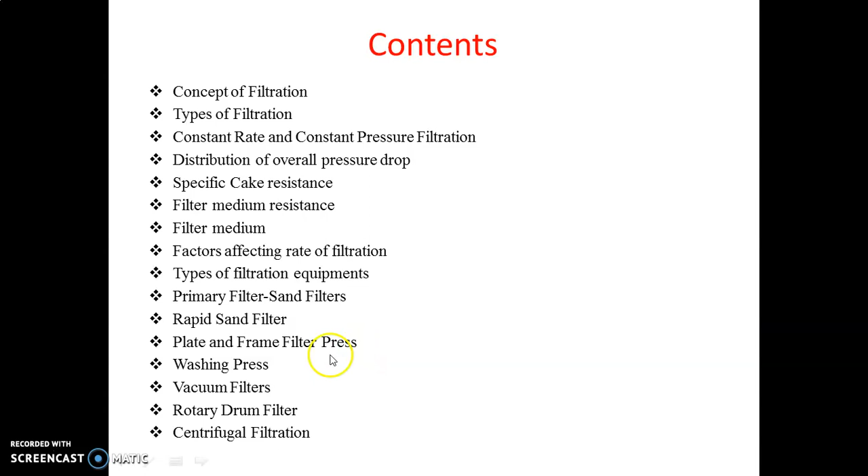Hello student, this video lecture is prepared for the particulate technology subject, and I will discuss unit number 4, that is known as filtration. In the previous lecture I had discussed the construction of the plate and frame filter press. Today we will discuss how the working of the plate and frame filter press takes place, and we will also discuss the washing press.

So at the end of the last lecture, we had discussed the construction of the plate and frame. Here are the photos of that plate and frame.

In the previous lecture I discussed that the plate has a solid surface with a ribbed surface, and the frame is hollow. If we look at this, this is the frame and below that is the plate. The plate has a solid surface and the frame is hollow, through which the cake is formed. This is the filter cloth shown, which also has holes at the corners. This is actually the plate and frame filter press.

To assemble these, you have to put the filter cloth here, then the plate, and rearrange the plate and frame. You have to place all these frames and plates on this metal bar, or rail, and then close this filter press by hand screw, which may be provided manually or hydraulically by means of air pressure. After that, the slurry is filtered.

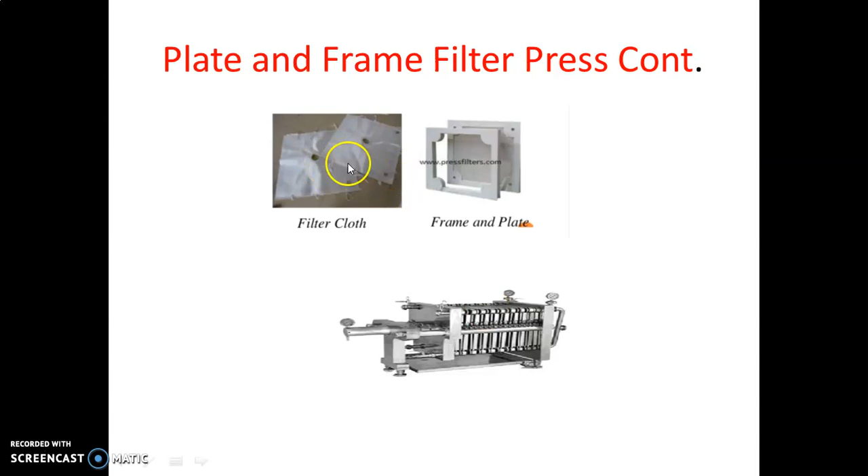Then we have to scrape the cake. The cake is deposited on this filter cloth on both sides, here and here. If we look here, the solids, or we can say the cake, are deposited, and then you have to scrape that cake. So this is the working of the plate and frame filter press.

And what are the size of the filter plates? 100 into 100 millimeter to 1500 multiplied by 1750 millimeters. So these are the size range. From this range to this range the plates are used.

And the operating pressure, that means pressure is applied to feed the slurry, that is about 700 kilopascal. So pascal is nothing but it is a unit of pressure. Newton per meter square is called a pascal, and kilo means you have to multiply that pascal by 10 to the power 3. So 700 kilopascals is the common operating pressure for that feed inlet.

Or it may increase up to 7 megapascal. So mega means you have to multiply by 10 to the power 6 by this pascal. So 7 megapascal pressure may be created in that filter press.

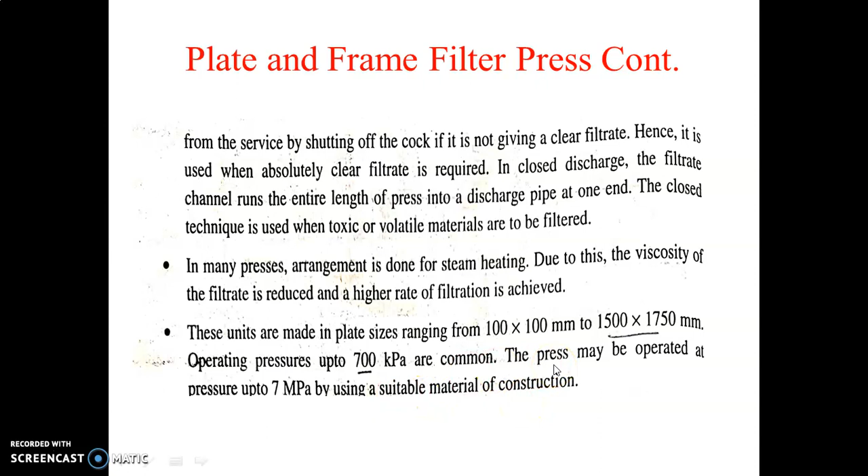So I will show one animation of this filter plate and frame filter press. So this is actually that press.

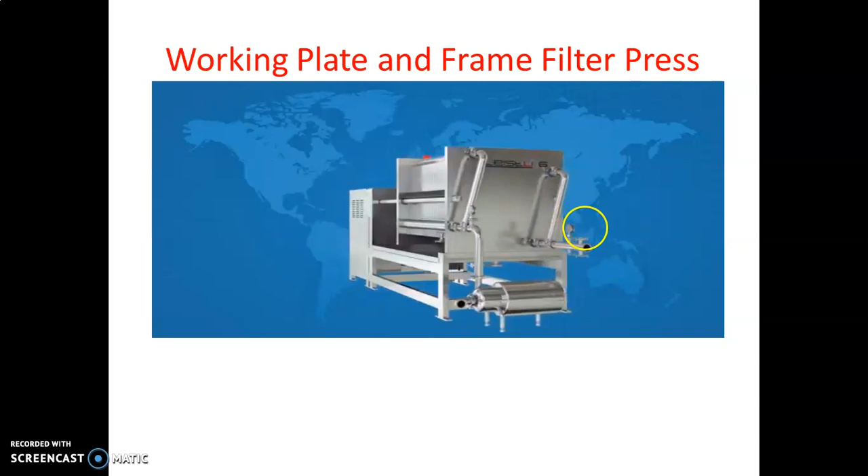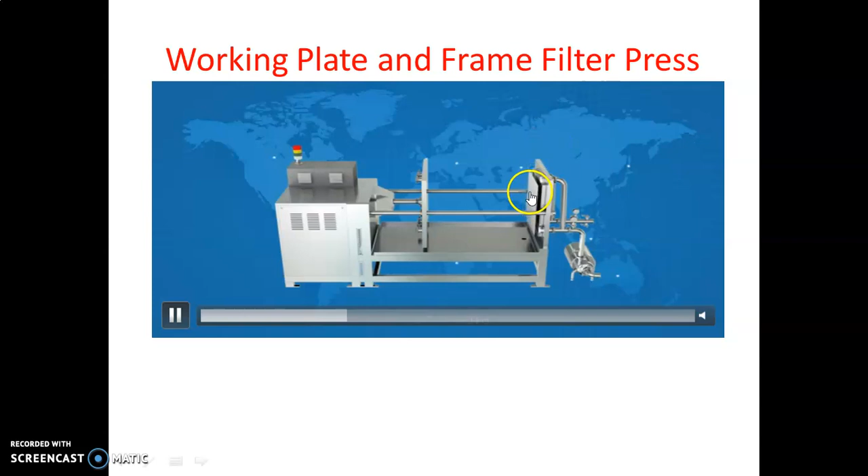So this is actually that plate and frame filter press. These are the end plates, that means at the end of that frame. So this is filter cloth is placed, this is frame, and you have to arrange them alternatively, and then you have to pass the liquid from here.

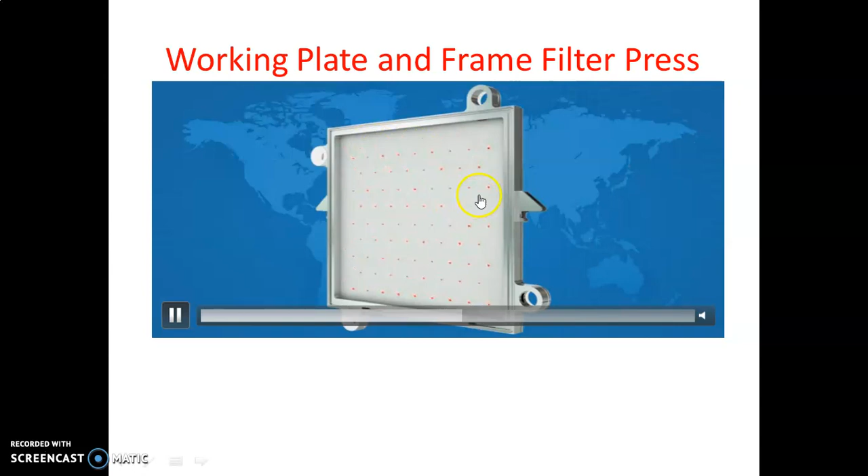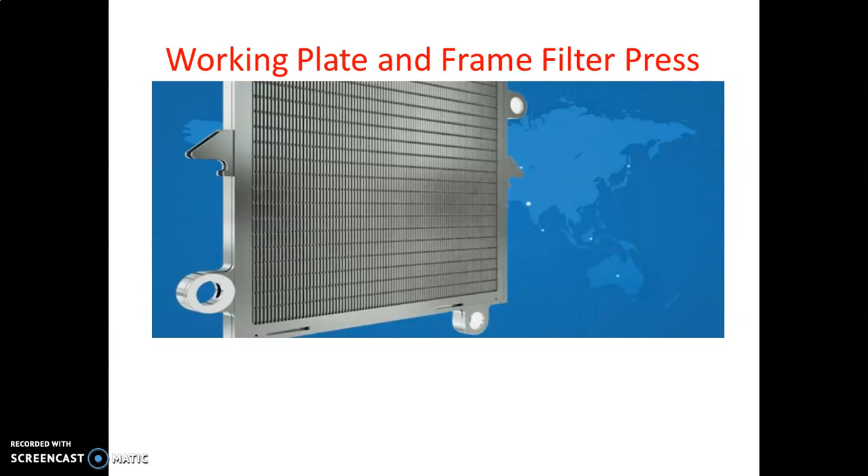So this is plate actually. So when this slurry is passing through this plate, the filtration is taking place on the surface of this plate. And here the cocks are provided, that means filtrate is collected here.

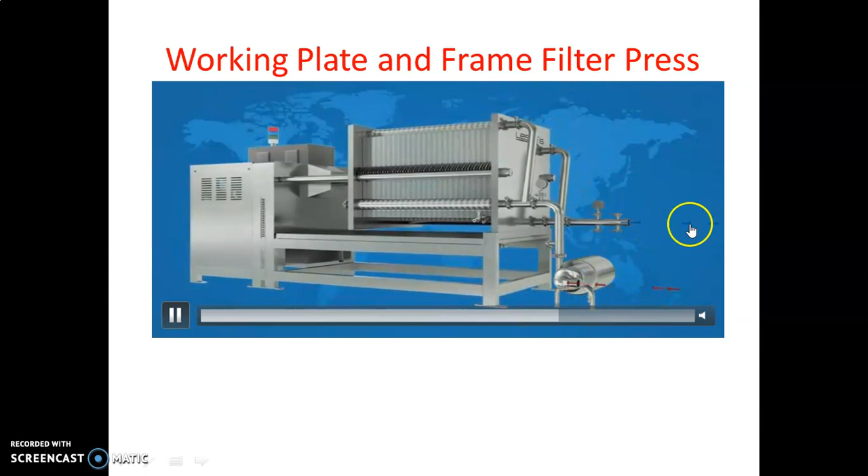So from here there is a feed inlet. I will again show, and here the filtrate. So slurry is going from this side and filtrate is going from this side. So in this way the plate and frame press is worked.

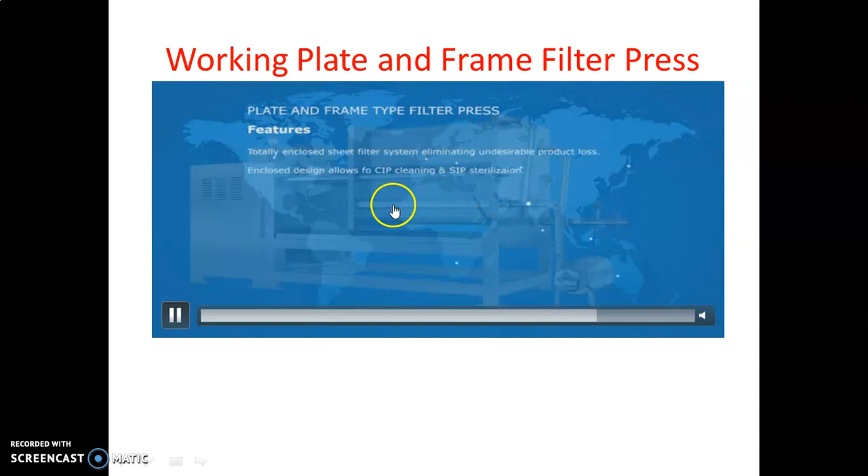Then I have already discussed that the washing is taking place to remove the impurities from the solid. So washing is taking place by two methods. In simple washing, you just have to add the wash water from here, and this will wash the cake, and it will enter from this place and remove from here.

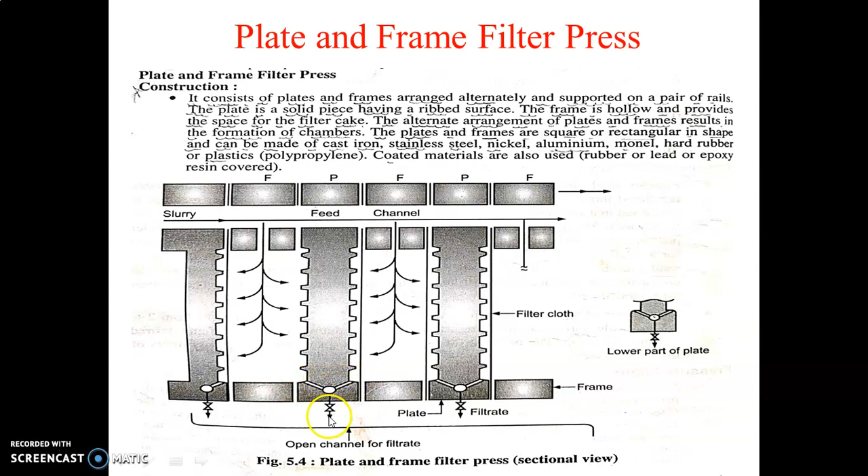But sometimes you have to wash that cake through washing, that is called through washing. So for that purpose we have to use a washing press. Washing press is nothing but there is a separate plate provided for washing. So that is called through washing. So when you use this washing press and filtration is carried out or washing is carried out, then it is called a washing press.

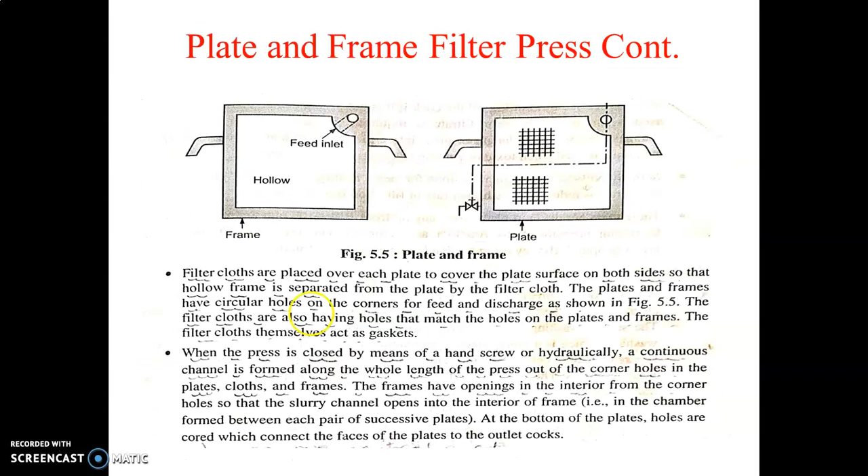So instead of 2 we are having 3, that means there are 2 plates and 1 frame. So out of these 2 plates, 1 is a washing plate. In the previous setup there is only 1 plate and frame. But if you want complete washing done, then you have to use the washing press.

So in washing press, the wash liquor passes through the entire thickness of the cake and discharges through the drain cocks. So for washing the cake, another slot or opening is provided.

And for recognition or identification purpose, to know which plate is washing or which plate is normal, we have to add buttons. So when one button is on that plate, it is called a non-washing plate. When 2 buttons are applied, that is called a frame, and when you use 3 buttons, that is called a washing plate.

So that means the non-washing plate is having 1 button, the frame is having 2 buttons, and the wash plate is having 3 buttons.

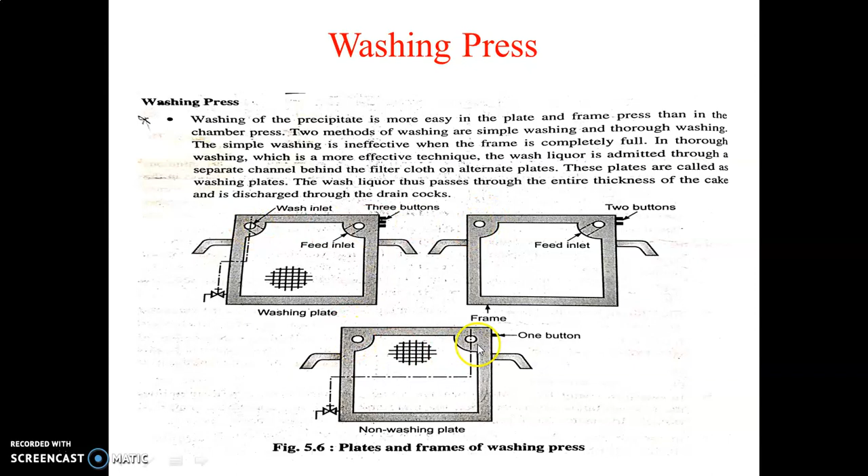So in this manner we have to rearrange this washing press, and separate channels are provided. That means when this washing press is assembled, we have 2 channels: one is the channel for feed, and another channel formed on this side is called the washing channel. So from this, wash water or wash liquid is fed, and from this we have to feed the slurry. So in this way we can use this washing press.

Then we will discuss how the working of this washing press is taking place. So that part I will discuss in the next lecture.